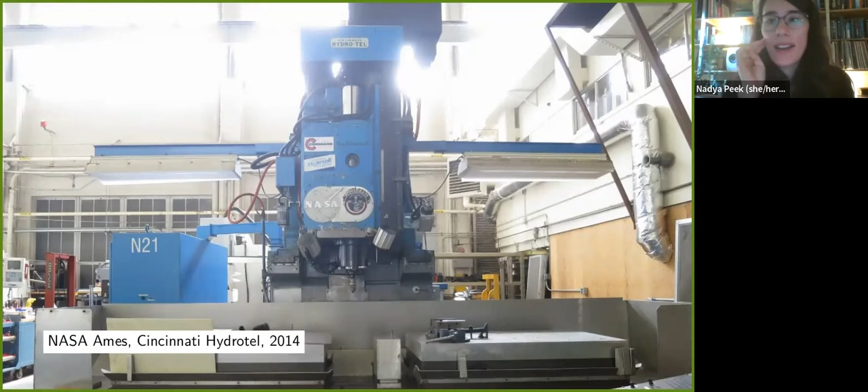The only difference between this milling machine and this milling machine is that one of them runs Windows 7 and the other one ran on punch cards. And so I guess there's a lot of ways in which maybe modern computation has made it easier to use machines like this, but there's not really something totally different in how we interact with these machines, or how we tell it what we want to build and how we're building it.

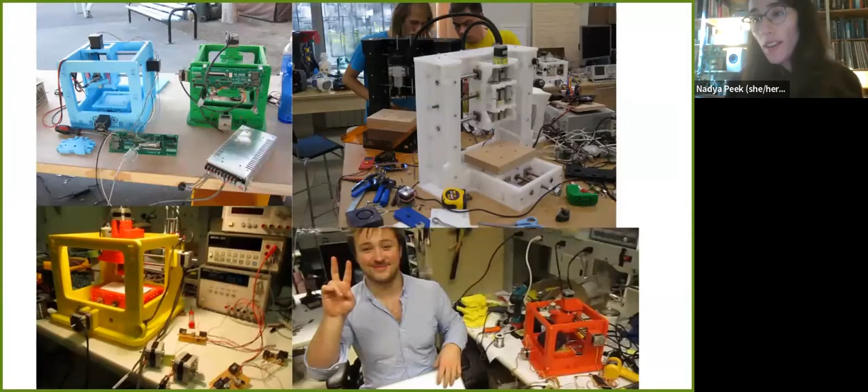Now, at first I thought that maybe this is just an education thing. It takes a while to learn how to use a milling machine. So how do you make it easier to learn how to use a milling machine? Maybe if you all had lots of smaller milling machines, it would be much easier to learn how to do the programming and play around with making different kinds of things, and ultimately be really comfortable using digital fabrication.

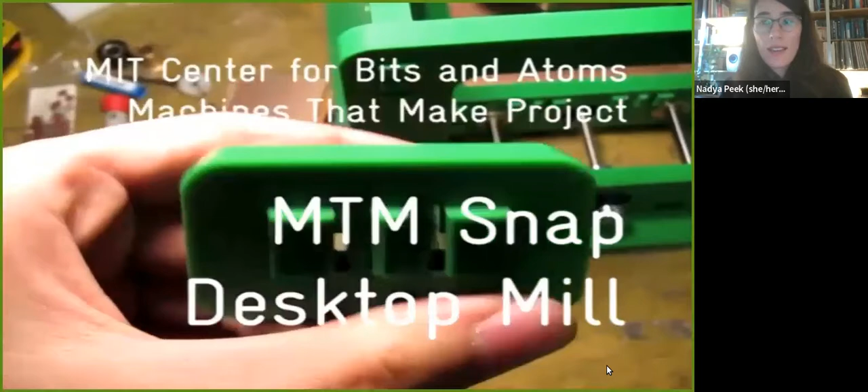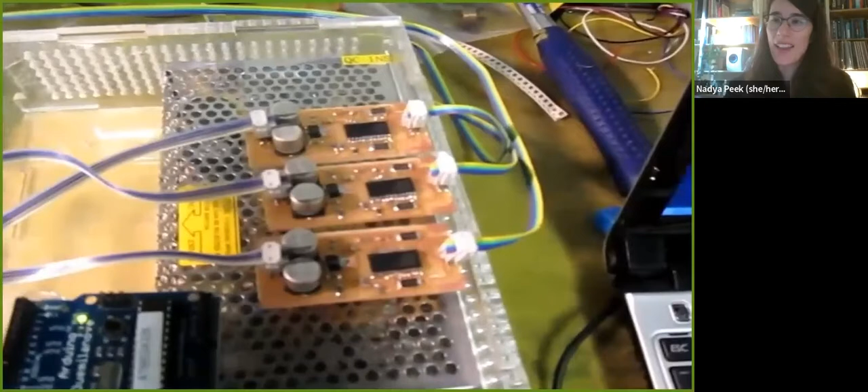So here are milling machines that I worked on as a graduate student at the MIT Center for Bits and Atoms with Jonathan Ward and others, David Lakatosh here in the picture. The idea was that you could go up to a milling machine, like a CNC mill you might have in your fab lab, and make a smaller milling machine, and then take that home and use it whenever you want. This was an open source machine made out of cutting boards that snapped together, and you could use it for milling circuit boards or wax blocks or other things that maybe you're familiar with doing at IAAC.

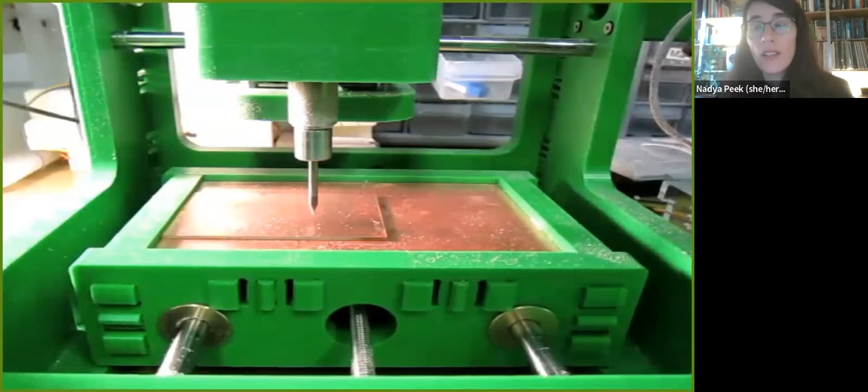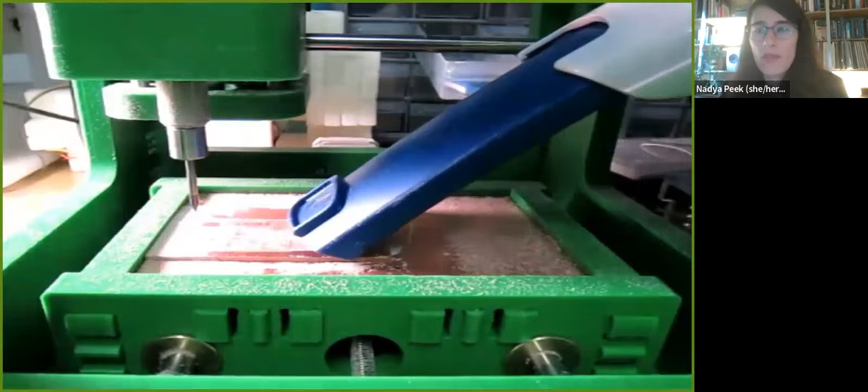And there really the idea was, if we can make the access exponentially grow, because anyone who uses a milling machine can now make a milling machine and therefore have a milling machine, then it will become much easier for people to learn more about milling, and they will do it much, much more. That wasn't really the case. There were not a huge number of people who built this machine despite it being open source. So we thought maybe the reason is the functionality of this milling machine is the same as the functionality of milling machines that you can buy off the shelf, and maybe people want something much more different or unusual.

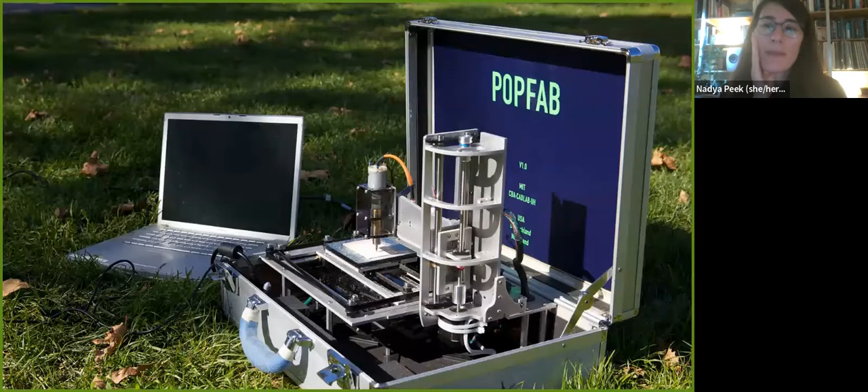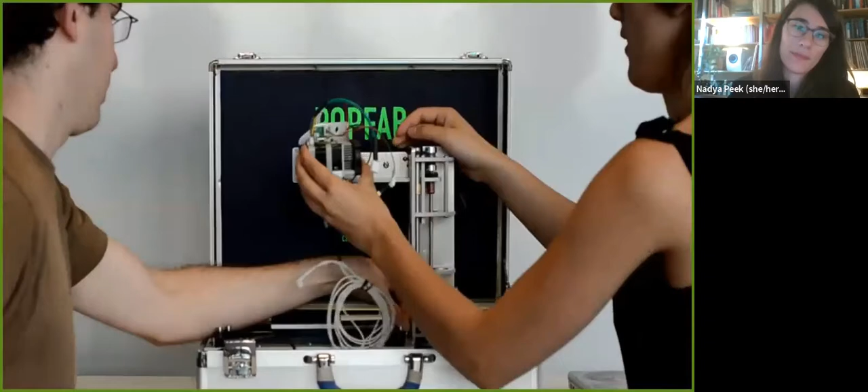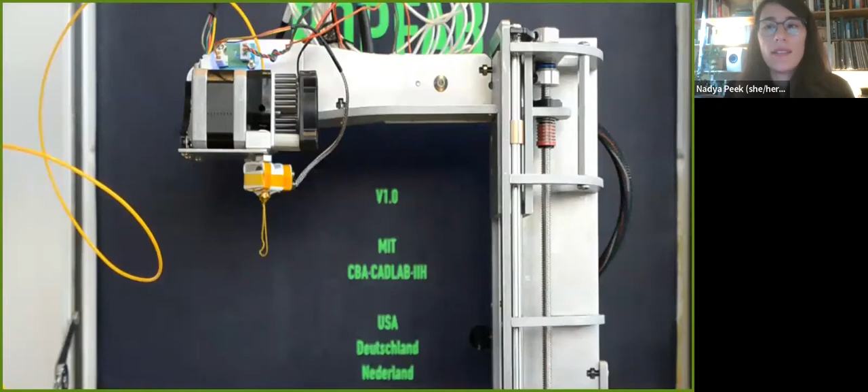And so with Ilan Moyer, I worked on something that we thought was going to be more like the laptop of digital fabrication. This is PopFab, which is a multi-type fabrication machine that fits in a briefcase, and you can open it up and put different heads on it. So here is a 3D printing head. It also had a milling head and a sticker cutting head. It had all these things that it could do in this one pop-up work envelope.

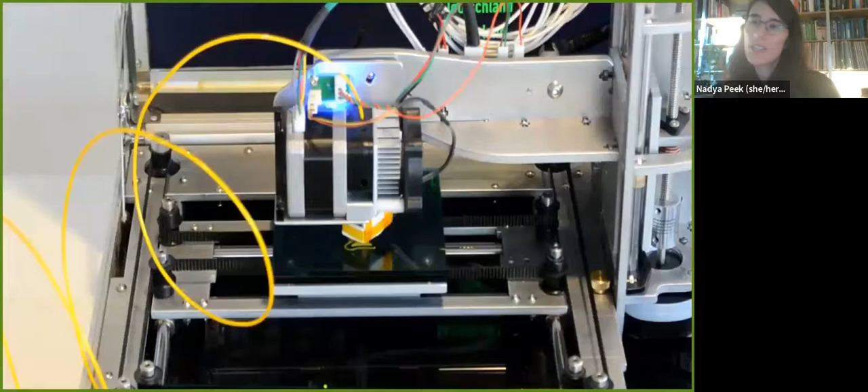It was sort of fun to carry this machine around because it did give you portable access to digital fabrication, as opposed to having to go to the Fab Lab or to a place where the machines were much bigger. But then there were other problems with the size. Ultimately, you couldn't make anything bigger than this work envelope. It was just like having access to a small tool that you carry around. And that was a major difference with a laptop and a supercomputer. If you calculate something on a supercomputer, you get a number out, and you calculate the same thing on a laptop, you get the same number out.

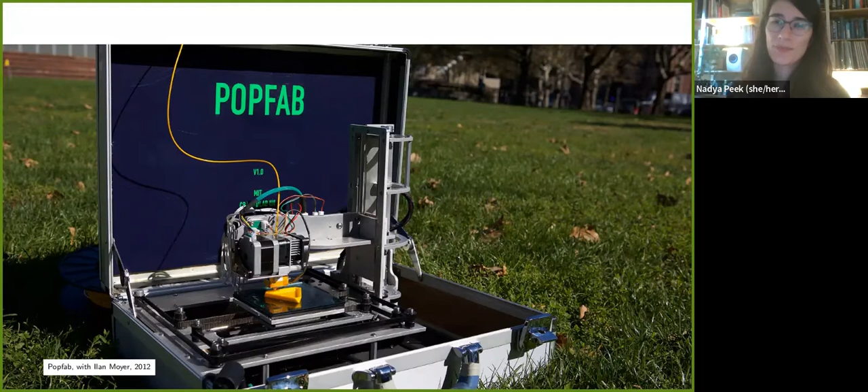And so despite having lots of fun building small machines that did similar things to bigger machines, I kind of came to the conclusion that it wasn't so much the learning how to use digital fabrication machines that was the problem, but more so that they weren't actually doing any of the things that people wanted to use them for. And even if they were very precise, you couldn't use them in lots of different contexts.

This machine, despite it being portable and being able to bring it to lots of different places, couldn't work in its environment. You couldn't change the context it was in. You could only make things within this tiny work envelope. And so thinking about, what does it mean to have precision as a creative tool, and how do you use it in these different contexts? And working with a lot of people who are talented machine builders, starting to wonder, where does this really need to go to make precision really into something that you can employ creatively in different contexts?

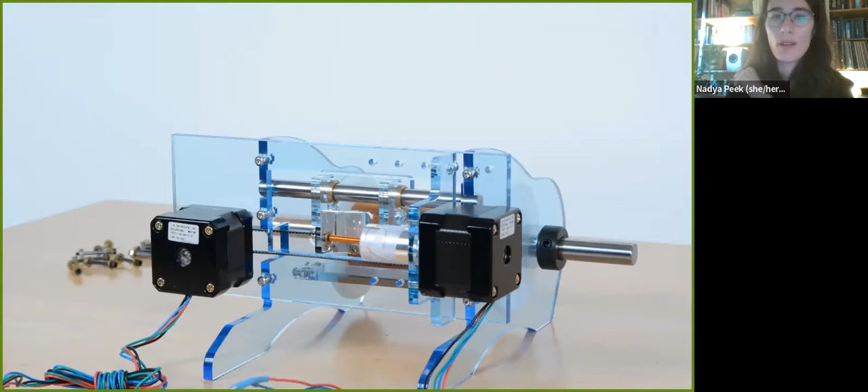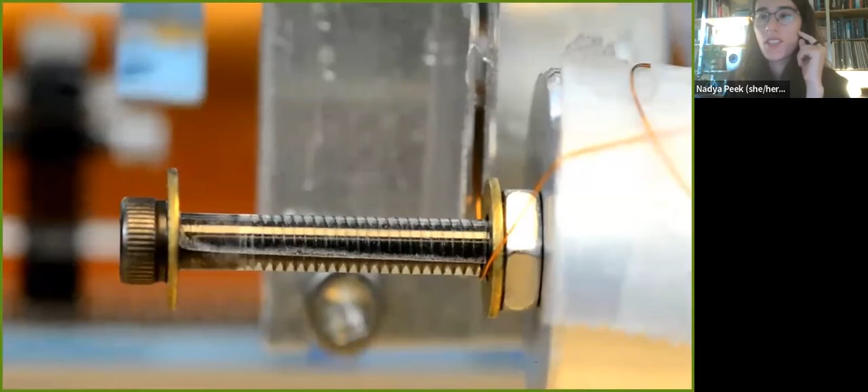And Ilan, who I was working with on PopFab, at some point needed a lot of coils because he was making electromagnets, and he made this little machine that I really liked. It's just 2 motors with a laser cut body, and the only thing it does is make these coils so that he could control the pickup and drop off of warp threads in a loom that he was making.

And it wasn't like he needed a ton of these coils. It didn't have to be super fast. He didn't need really high efficiency in the production. But what he needed was all of the coils to be exactly the same. And winding them by hand would have been really tedious and a lot less precise than this machine that he was able to really rapidly prototype using digital fabrication tools. And so it made me start thinking about, okay, what goes into the rapid prototyping machines, and how do you even define what the machine is and what it does?

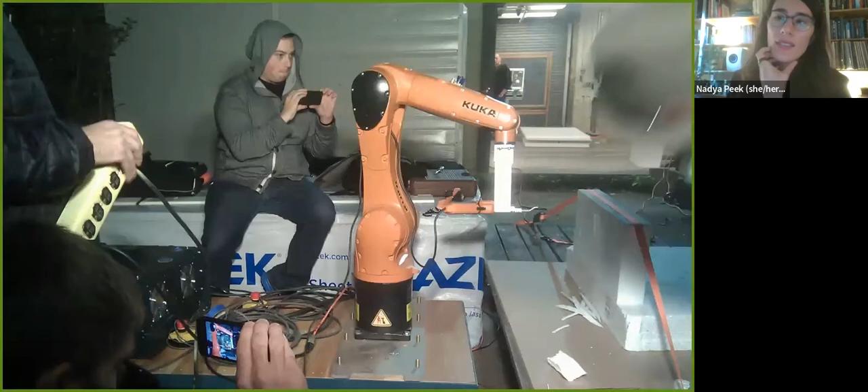This is an example that I think is really telling about how to be able to reconfigure a machine to do something that you want. These are architecture students who are cutting a complex surface out of styrofoam, which you see on the right. And they made their own CAM module in Grasshopper. They're doing all these complicated calculations. They have this cool robot arm that they can control using Kuka PRC. And then they're cutting the styrofoam with this hot knife. So the knife is at the tip of the robot arm.

And the temperature control of that knife needs to be such that it cuts the styrofoam well, but doesn't melt it too much. And to be able to control that temperature, they're trying to get this done, it's late at night, they just asked the guy who's standing here on the left to flip the switch on the surge protector, turn it off if it gets too hot, and turn it on if it gets too cold. So despite us having access to all of this technology, all this computation, so many people involved in this project, the system integration to this machine was so complicated that the fastest and cheapest way to do this was just to have someone stand there the entire time during runtime, controlling something that would have otherwise been an extremely simple control algorithm to write.

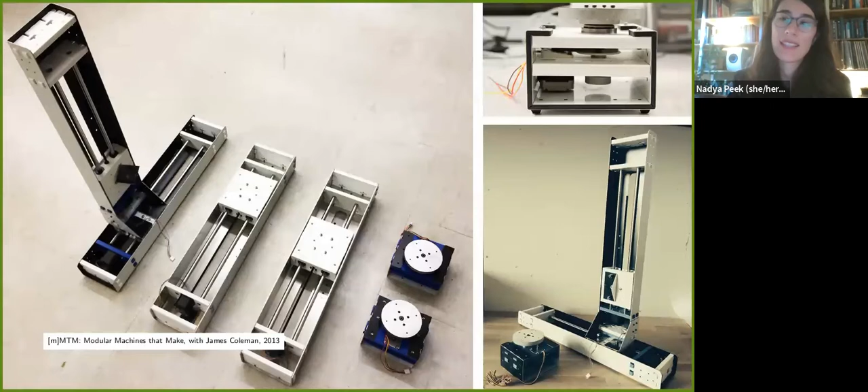Like, how do you make it as easy as possible to set up lots of different digital workflows, digitally controlled workflows. So together with James Coleman, I started building all of these little modular machine parts. So these are linear stages and rotary stages and different machine modules that you could connect together in different ways, so that you could build machines sort of on the fly.

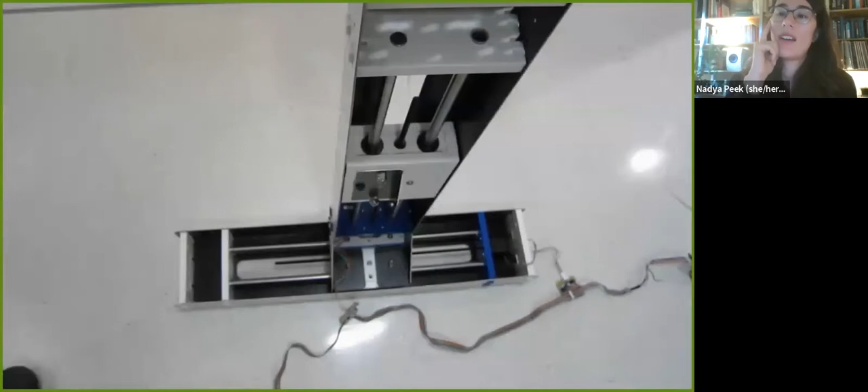And an important part of this was not just the stages, so here we are doing more foam cutting, but also the controllers that allowed you to just add more and more components to the machine as you were doing different things. So here I'm plugging in these little Gestalt nodes, which we worked on together with Ilan Moyer again, to be able to control each module individually, but as a network of components that you could then all talk to at the same time.

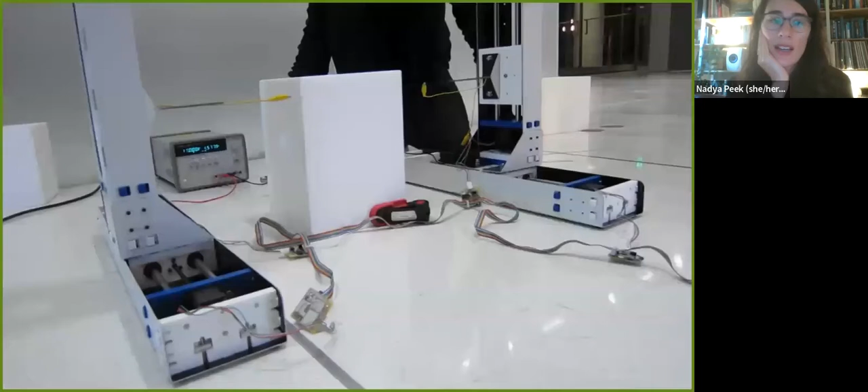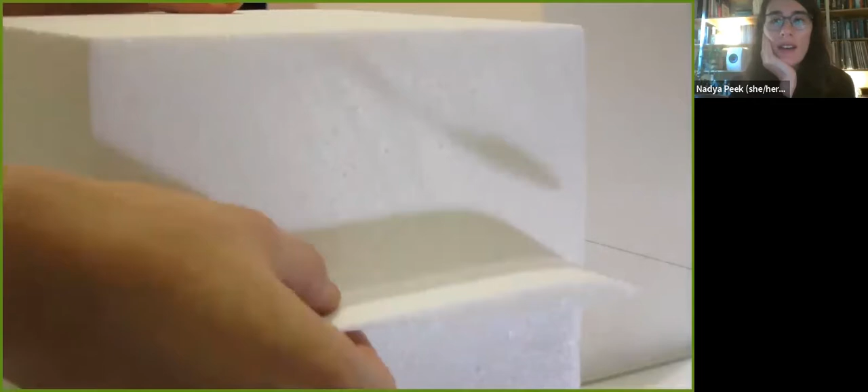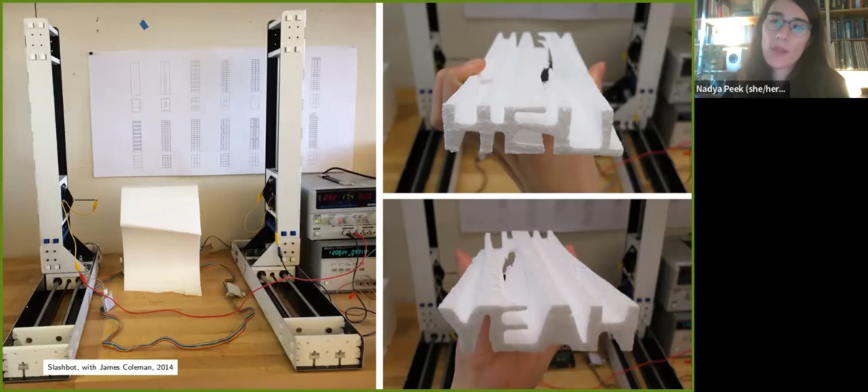And so as you were adding different functionality or different parts to the machines, you didn't have to redesign the whole control board, or you didn't have to rewrite the firmware. It was a matter of adding and removing things from the network. Yes, very serious fabrication task. And so that way you're also able to interface with different kinds of design software to be able to build your toolpaths in lots of different experimental ways.

Here's a part that I think I would be very, very hard pressed to make by hand. Styrofoam thing that says hell on one side and yeah on the other. So it's just the kinds of things that you can do if you have control that are so difficult or almost impossible to do by hand. And if you want to change anything about the machine, instead of adding a person flipping off and on a surge protector, you're just adding another node to the control network.

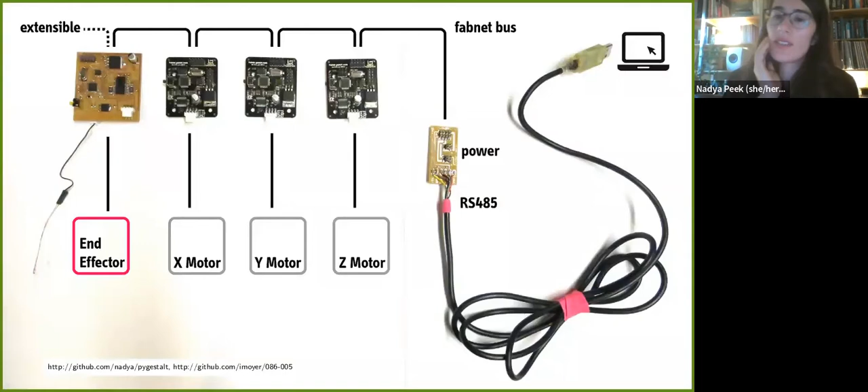And when you add another node to the control network, you describe that node in what we call the virtual machine in a Python library that we wrote. Yes, and the Python library basically allowed you to also switch out virtual machines that were maybe talking to different software applications or different physical machines as sort of a lightweight interface layer. So say you wanted to talk from your own Python script, you could then talk to the virtual machine object, which would then control the machine.

Or if you wanted to change the machine, say you were using a small machine and now you wanted to change to a larger machine, or to a machine that had a different drivetrain, you wouldn't have to change anything about the toolpath design software. You would only have to change the virtual machine object to make sure that you're describing the correct machine.

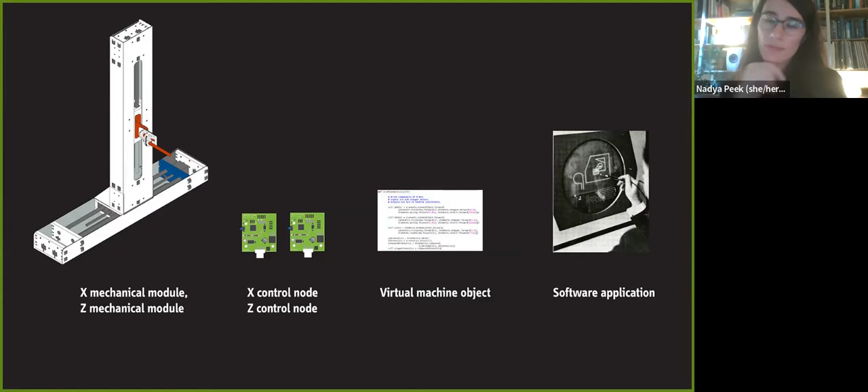So you can control it from Grasshopper, or you could control it from mods. I don't know if you at IAAC in the Fab Lab are using mods, but you know, ways of controlling machines from browsers or creating different interfaces, and really making it easy to set up lots and lots of different kinds of workflows.

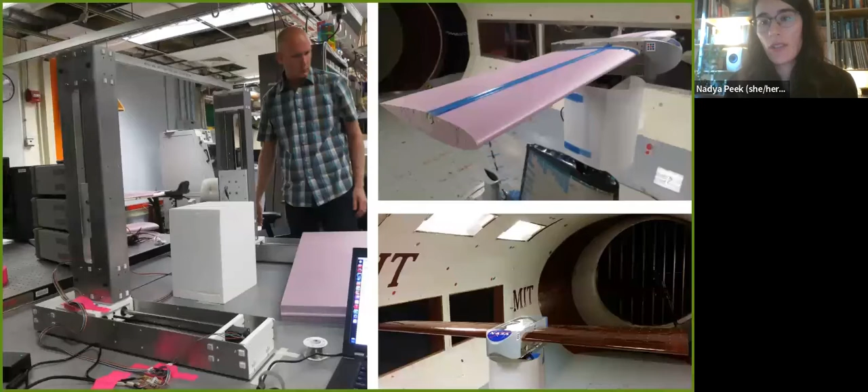Here is a machine that we built very quickly for Janet, who needed to have this airfoil at very short notice. And so we set up a machine to cut a much bigger version of the example cuts that we were making. We made different 3D scanning machines and image capture machines. And we made a lot of different machines with these modules.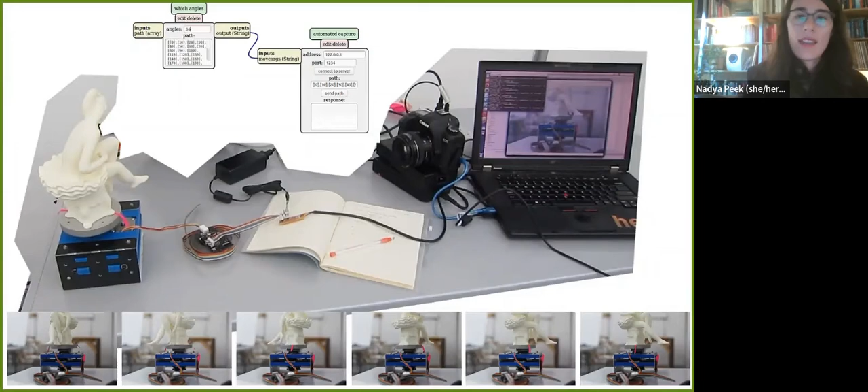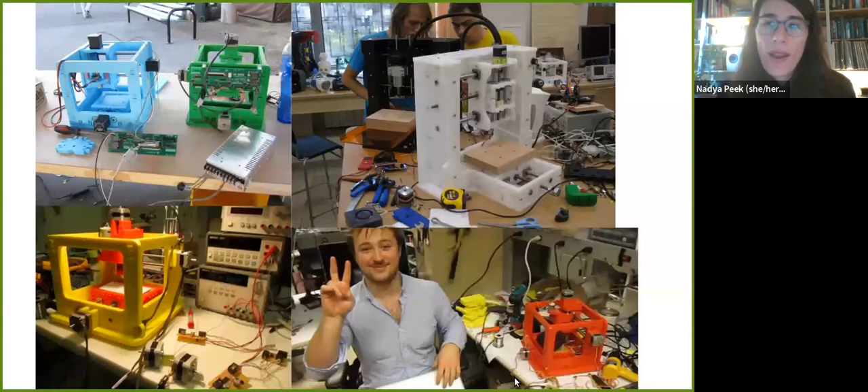But the problem was that just we had the modules. They were like the MTM Snap that I showed you before, and like PopFab, all of these things were open source, but nobody else was building them. And part of it was maybe just that it was too hard to build a lot of the machines that we designed. PopFab was water jet cut and required a lot of complicated assembly steps. The MTM Snap was maybe slightly easier to make, but still required some complicated system integration.

There's just not a lot of people building the modular machine components that we had built. They were all made out of sheet metal and things that you needed maybe a brake for, or other sheet metal working tools. And it was just not something that other people were taking on.

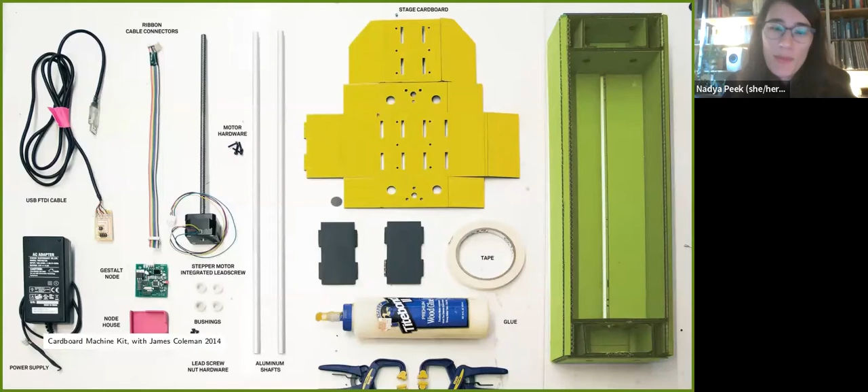So James, Alon, and I decided to make a much more lo-fi version of the modules out of cardboard. So we developed a cardboard machine kit with the idea that you could really quickly prototype a machine, and the point wasn't to replace existing machines. So we're not saying, oh, get rid of the Cincinnati Hydrotel at NASA Ames and replace it with a cardboard machine. No, it was, if you don't have a machine and you want to experiment with how to quickly build one, kind of in the spirit of Alon's coil winding machine, then how do you make that

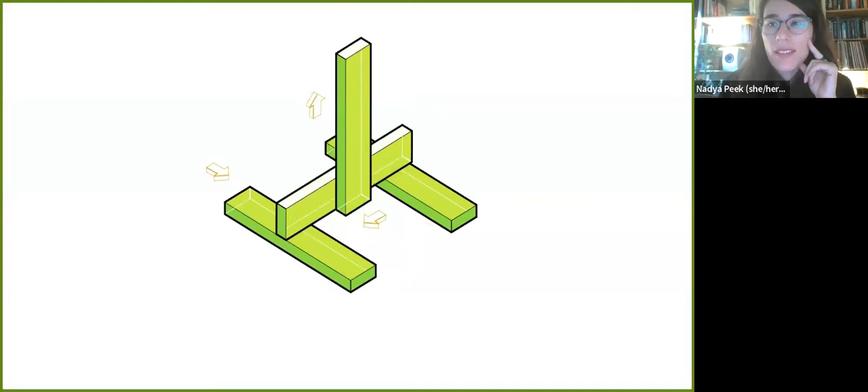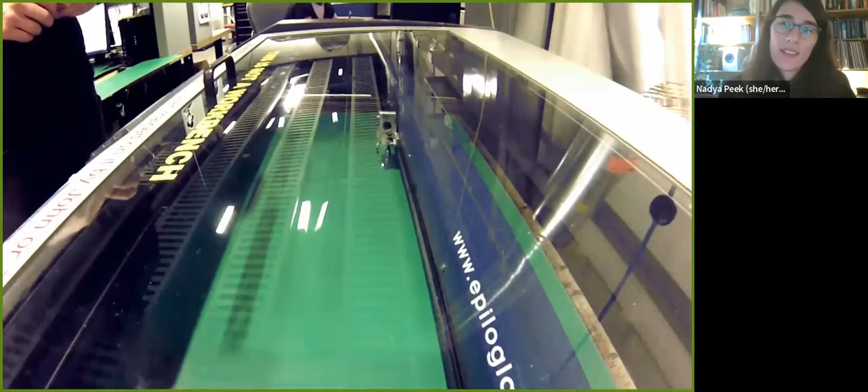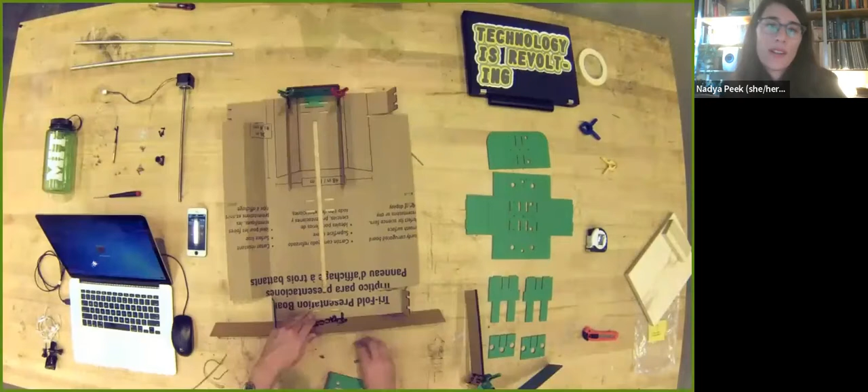as easy as possible? So the cardboard machine kit was laser cut cardboard. So you use the precision of the laser cutter to be able to make the frame. So here I am laser cutting, and you're partially scoring and partially cutting through the cardboard to be able to do accurate folding. Here are the Gestalt nodes for the network controls, and the cardboard stages had different positions in which you could connect them to each other.

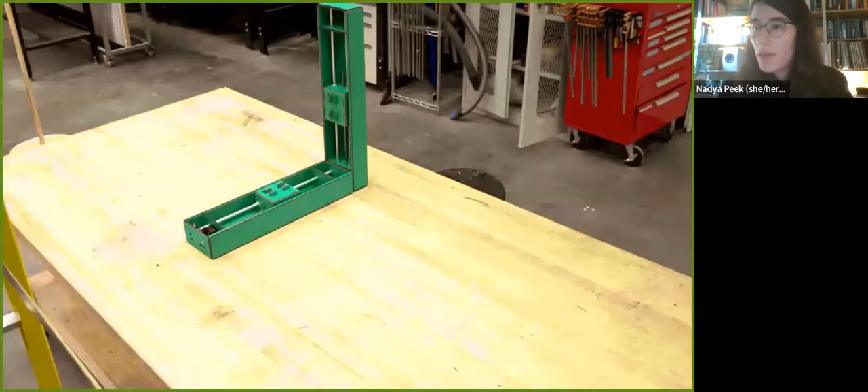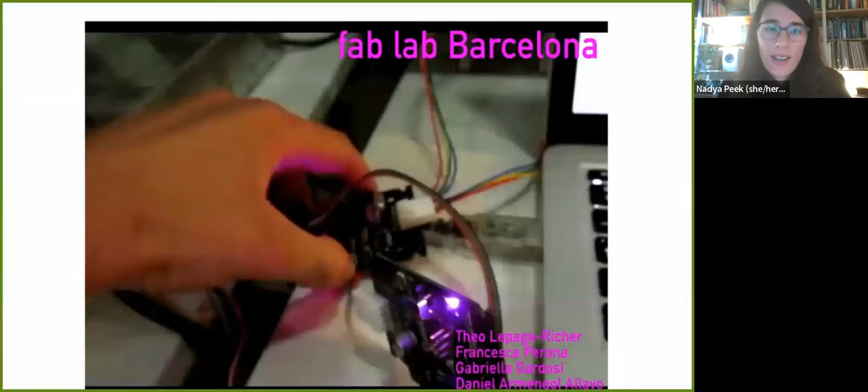So the idea was that it wasn't supposed to be months before you had built a machine, but a matter of hours, or that you could really prototype computer-controlled motion very, very quickly. And we actually used this in teaching in Fab Academy for a few years, where lots of people in Fab Labs all over, including at IAAC, made a bunch of different kinds of machines with it. So machines for plotting and machines for coffee mixing. This is like an iPhone 3D scanner. And a lot of these machines, they're not the most fancy or serious things. They're doing funny stuff like light shows and cocktails and ketchup.

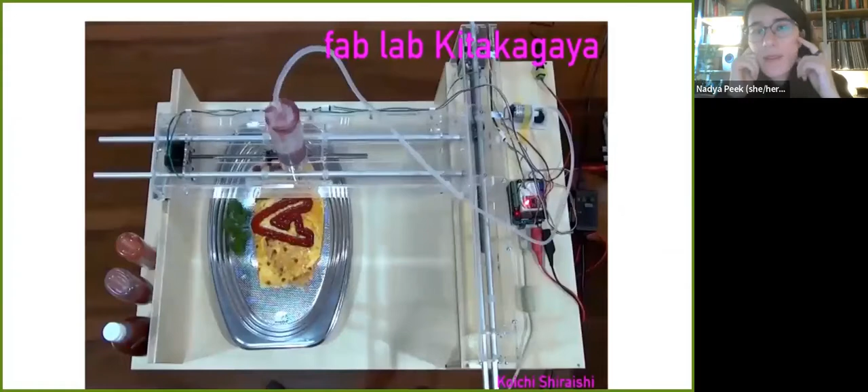But it was the possibility of iterating with, nobody was thinking, oh no, here's a scary machine and I don't know how to hack it. Everyone is like, oh yeah, it's just a bunch of stuff that I put together made out of cardboard, and I can easily add an extruder, or I can easily add a syringe, or I understand how to interface with and modify that. And that kind of iteration allows for using things in lots and lots of different ways.

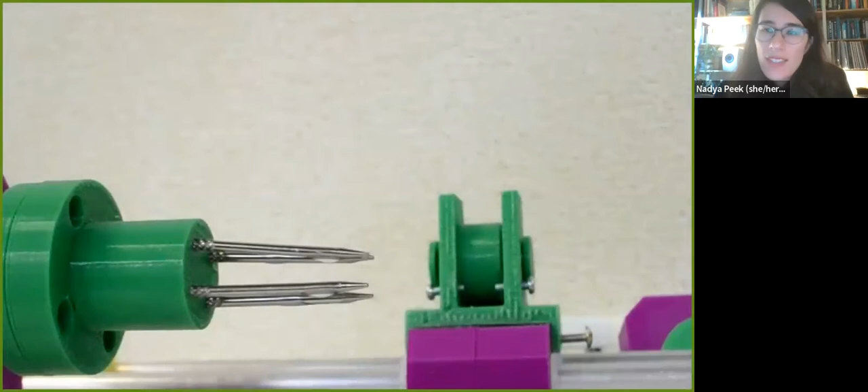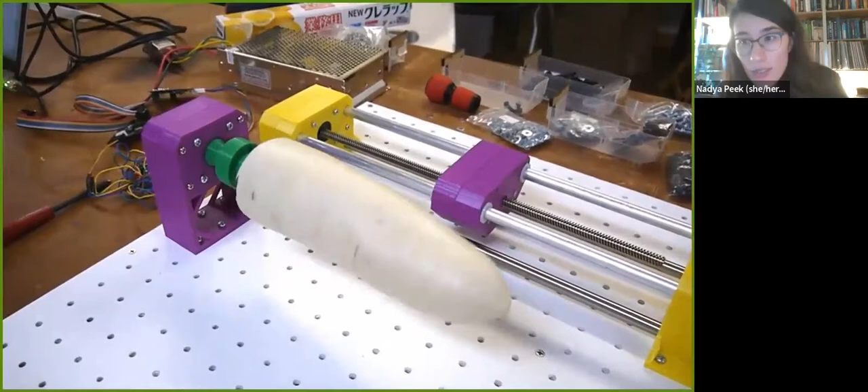Yeah, maybe I can show you this specific example of one of my favorite machines from Japan, from the Fab Lab Sendai. It's for daikon radishes. And you can see that they have some digital fabrication skills already. They're good at 3D printing, and they have these motors, and they have these modular controllers that they're connecting to each other. And even in this 2-week Fab Academy assignment, you can see them learning different things to be able to understand how to automate this peeling of a daikon radish, or making daikon radish noodles. So they added this tailstock. They looked at different things that had to do with the starting speed and the amount of force that was necessary to start versus to continue.

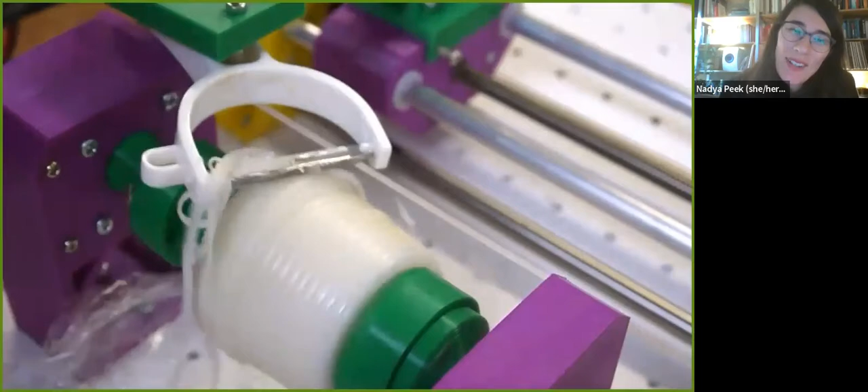Yeah, and you know, these daikon noodles, it seems kind of silly, but it also seems like the kind of thing that would be mega tedious to make by hand. So just the idea of making inexpensive, quick turnaround little kitchen robots. I love it. I think it's very funny.

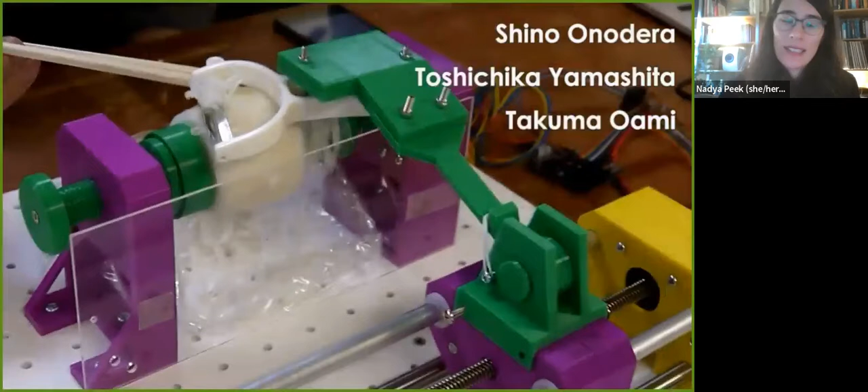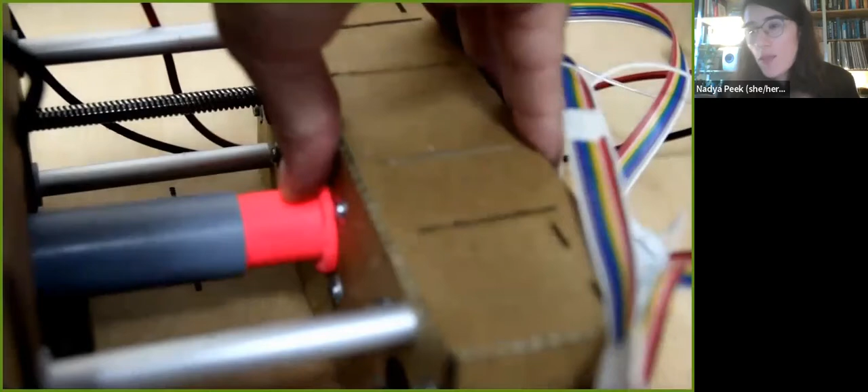There's another machine from a fab lab in Mexico where they wanted to have also a super application specific machine for connecting PVC tubes together at different angles. So to be able to connect them together at different angles, you have to be able to cut curves into them. You can't just cut them straight. And so this is a hyper specific machine just for cutting tubes of this size and different curved tool paths.

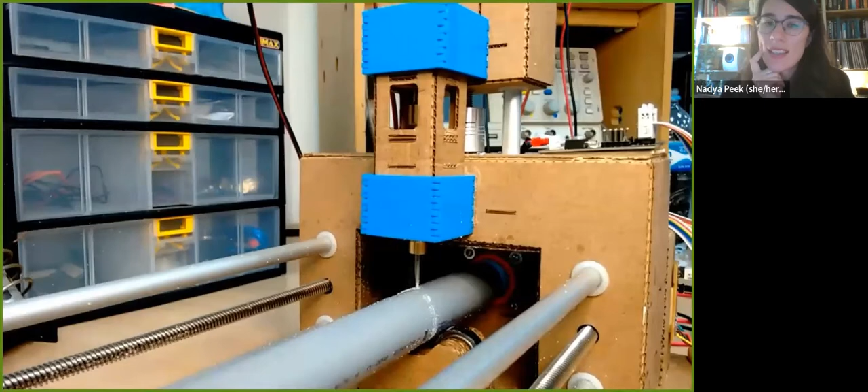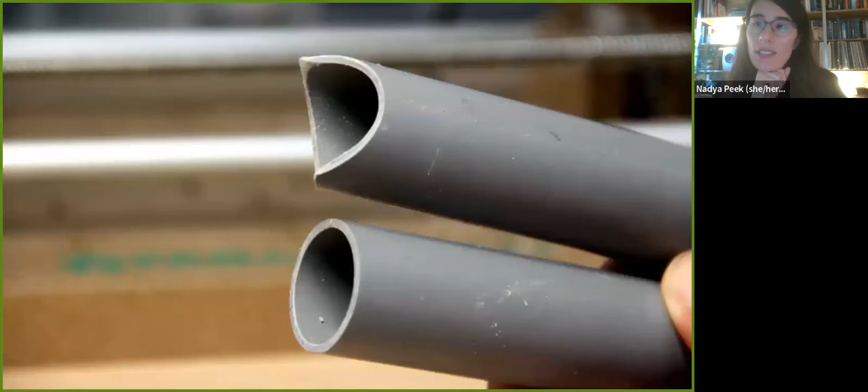And because it's just a very small structural loop, because you're only using this tiny end mill, you don't actually need to make the whole machine out of cast iron or the traditional kind of machine building materials. But experimenting with, okay, I need this particular cut, and I'm going to put together this machine to make this as easy as possible. Yeah, I don't know. I thought these are two great examples. Exciting stuff.

So with digital fabrication, people often think, oh, digital fabrication is just one machine. I'm going to go up to the 3D printer and that's the machine that I'm going to be using. But actually, I think digital fabrication is the creating of all of these different workflows that span materials, computation, design. There's all these different parts that can be varied, that are interdependent in different ways.

And it used to be that those things were all actually separate jobs. There was someone who did CAD, and there was someone who ran machines, and there was someone who programmed. And those people had to communicate with each other. And all of these things ended up developing in these siloed environments. And so sometimes the most difficult thing about doing digital fabrication or different kinds of computer controlled workflows is how to translate from one to the other.

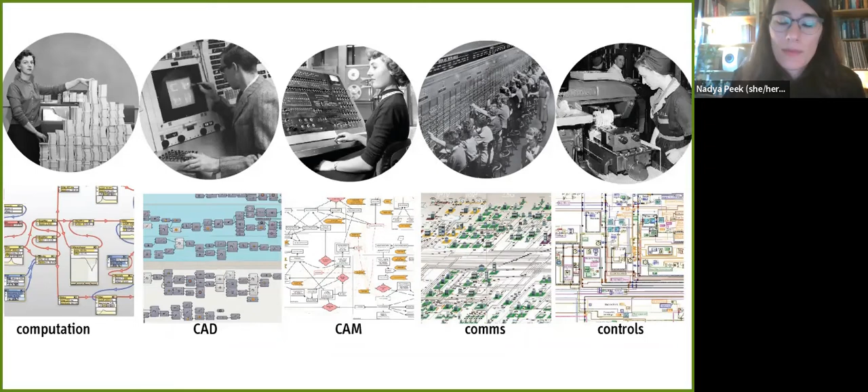I'm sure that you at IAAC have had lots of trouble where you wanted to export something in some format, and instead you needed to export it in DXF R11, or there's all these problems in translation that happen that are difficult. And how do you support that? How do you support the making of the workflow and being able to test at different insertion points? How do we make tools actually for creative automation?

And when I was in school, what we were taught was you start from design intent, and then you make a digital model, and then you slice it, or you make the CAM for it, you create the machine instructions, and then the machine makes the final product. And then you iterate, and that's how digital fabrication works, this sort of canonical workflow for digital fabrication. But

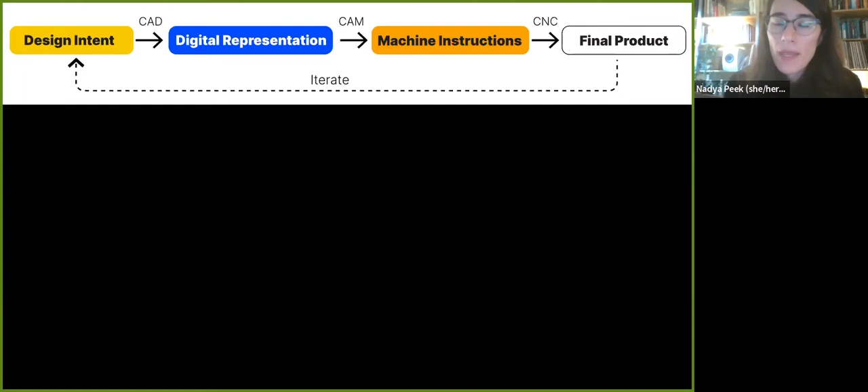when you look at what people are actually doing with digital fabrication machines, and over the pandemic, my student Hannah Twigg-Smith has spent a lot of time looking at plotter Twitter, the hashtag for sharing different kinds of plotted art, really what we found is it's not this canonical workflow at all. It's people constantly experimenting with different pens and papers, and experimenting with different speeds. They're not all trying to have this seamless user experience. They're really trying to iterate and develop custom workflows that allow for lots of different kinds of exploration.

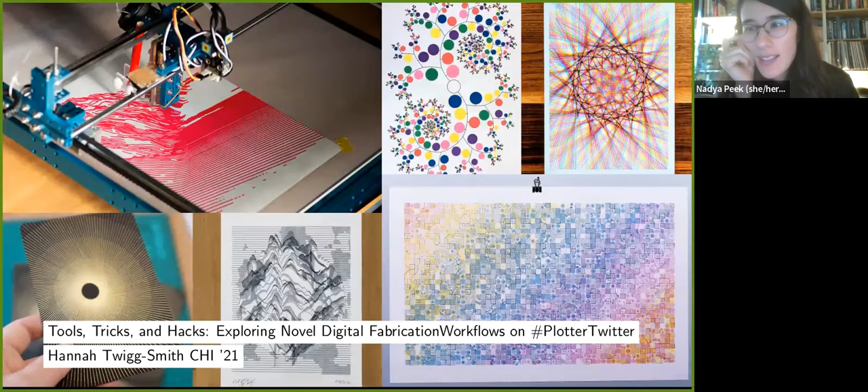And so when we develop tools for that, how do we support that generative and iterative kind of work? Rather than seamless experiences, how do we support creative practice? And so that, I think, has to tie further down, not just modularity in the machines, but also modularity in how we talk to them and how we extend them. And so for machine design and machine building, that has changed my approach.

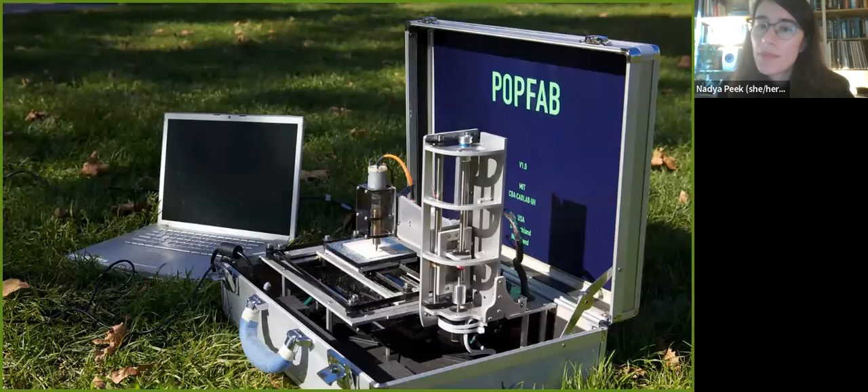Rather than making things that look really slick or fancy, how do we make things that are actually easy for other people to build? How do you make it fabricatable, so that you have limited equipment required to be able to build the parts, and that the putting together of the design isn't super complicated. Whereas with the MTM Snap, you needed maybe several people to hold parts at a certain time to be able to put it together.

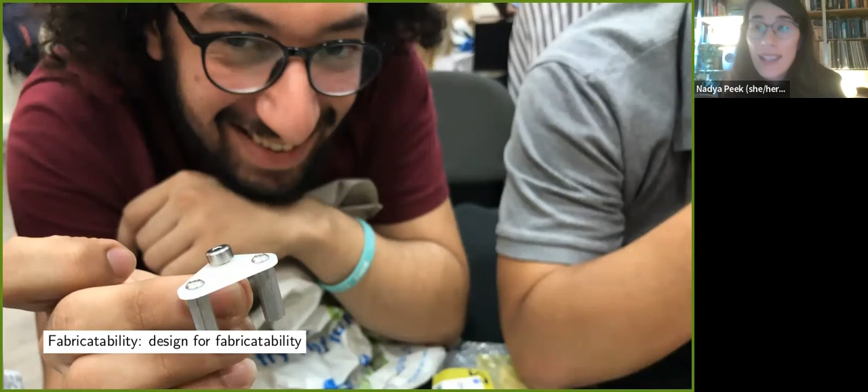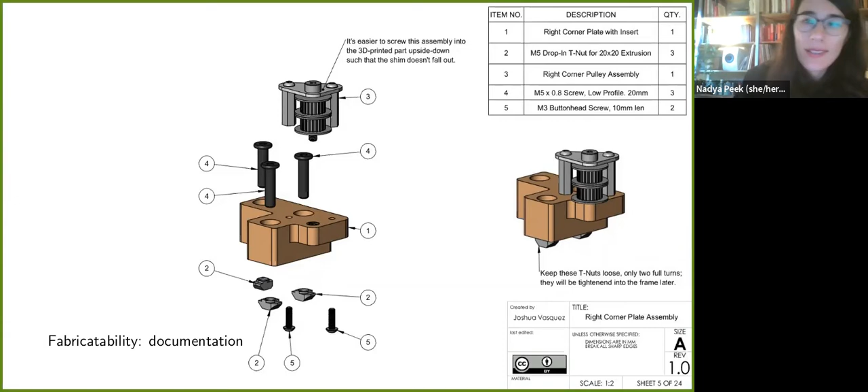How do you make the assemblability of the design super easy, as well as the documentation, something that a lot of people can follow without necessarily having the same expertise that you had going into the project? And how do you also include in the design all the tools that you need for building the design? Here we're pressing these pins into the blue 3D printed part, and underneath there is an orange support part that's holding the 3D printed part, such that the pin is going in exactly at 120 degrees or 90 degrees with respect to the table.

And so it's a very different kind of design criteria, or very different design goals than you would otherwise see in industrial machines or machines that are made for really high efficiency and high throughput. Instead, it's more about extensibility and being able to be customizable by other people. And how do you also support them? In my group, we support a lot of active Discord communities for people who are trying to build our machines. Instead of just saying, read the manual, how do you actually really support and understand who is trying to build and extend them?

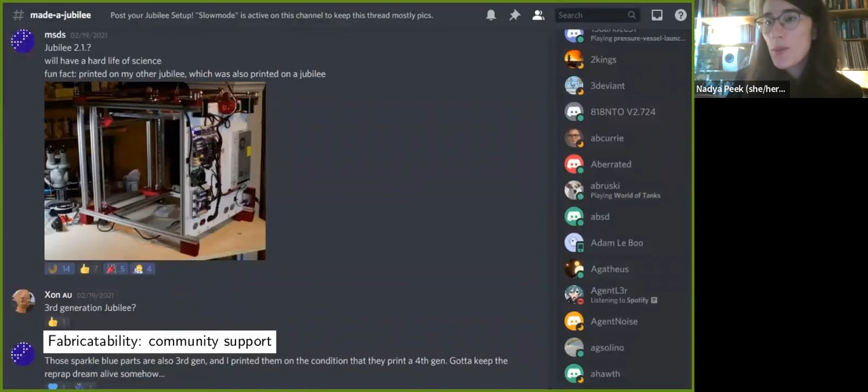So one such machine is Jubilee. Jubilee is kind of similar to PopFab, in that you can change tools to have different tools on it, but it does the tool changing automatically. So you can pick up and drop off different heads to be able to use different tools in one workflow.

So for example, it has a cable-driven tool lock. So here is how you would attach, for example, a microscope tool head. It has a little wedge plate, and then there's a twist lock that holds it in place. And this is a kinematic mount, just like in PopFab. So whenever you pick up and drop off the tool, it ends up in exactly the same place.

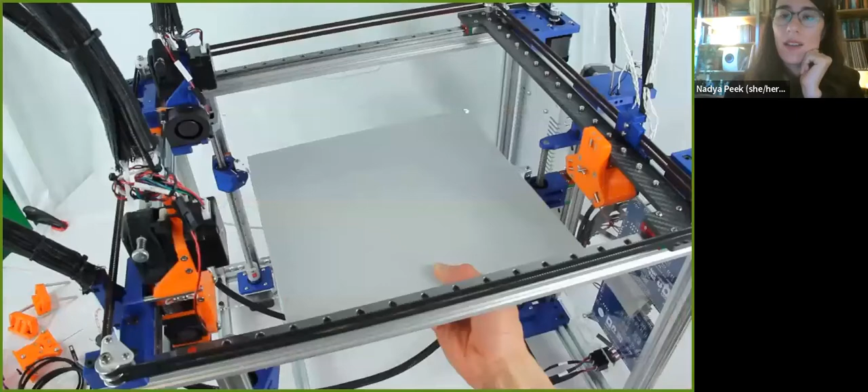The bed plate is also a kinematic mount, so you also don't have to re-zero every time you remove or put back the bed plate. Yeah, you can do a bunch of different kinds of operations. You can pick up and drop off pen tools, or a lot of people who use Jubilee use it for multi-material 3D printing. So you can drop off one extruder head that's printing in blue and pick up another extruder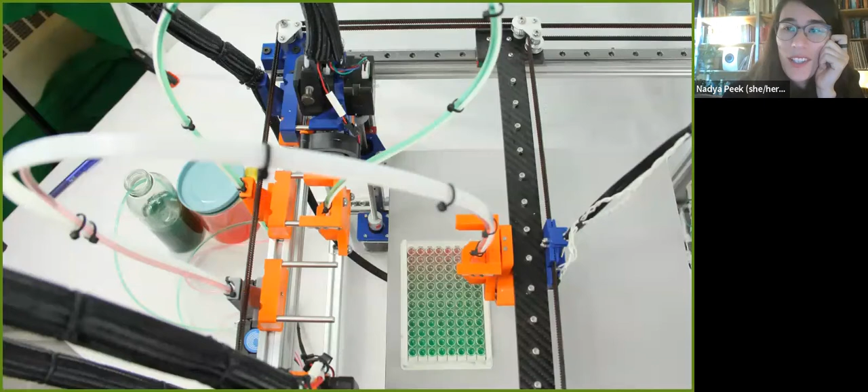head that's printing in orange, or use Jubilee with its syringe head for doing different kinds of liquid transfer, to be able to do different kinds of, yeah, I don't know, bio stuff. Increasingly, we do a lot more with science experiments, workflows, not just different kinds of fabrication steps.

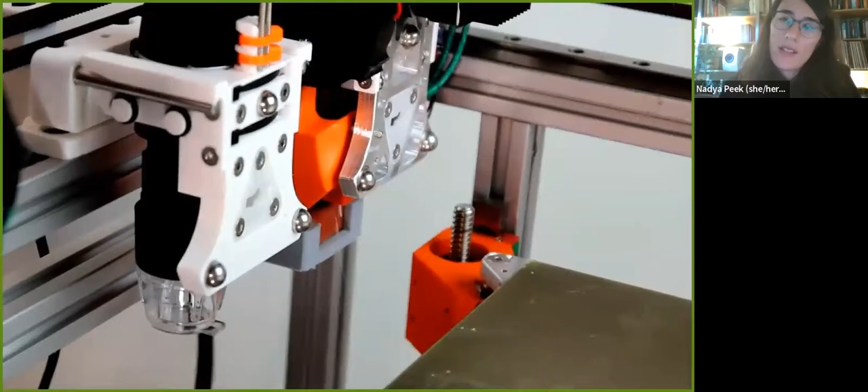Yeah, and I guess unlike maybe some of the other machines we made that were more slick in terms of their industrial design, Jubilee is really designed for A, automatic tool changing, and B, being able to do these really heterogeneous workflows. For example, to be able to do microscope inspection of something and 3D printing in an automated fashion. So you can drop off a microscope and then pick up a different kind of tool to do something totally different.

And instead of just for fabrication, people are increasingly using this for doing things like how do you create automated diagnostic tests? So if you can gather images of a sample and then do something with them, how can you use computer vision and other tools to automate some of these parts?

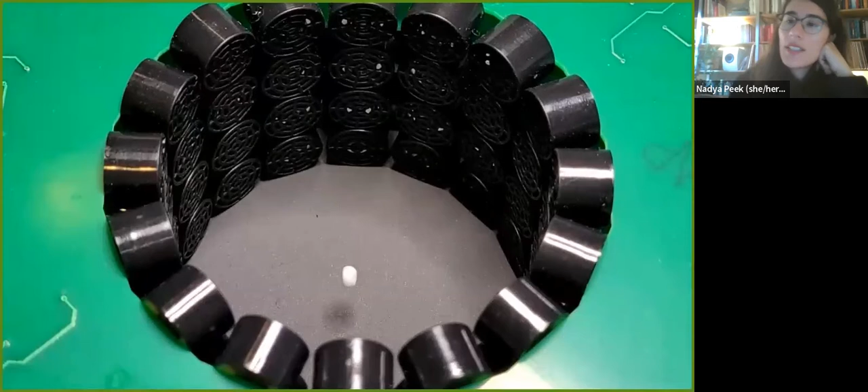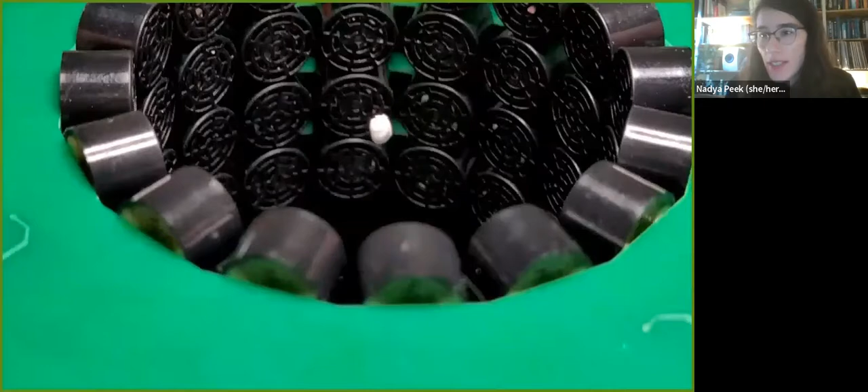We're also making novel manipulators for picking and dropping off things. So if you don't want to touch a sample, for example, this is an ultrasonic manipulator that can pick up small things and keep them in what we call a virtual container. So you can then suspend, this is like a styrofoam pellet, but you could also suspend water or small insects in air, and then drop them off without ever having to touch them, maybe damaging them.

I've been talking at you for a while, so I'm going to speed through maybe a few more things, and then I'll let you ask me questions because I don't see anyone, so it's sometimes hard.

This is a project by one of my PhD students, by Hannah again, who's creating different kinds of browser-based controls for controlling machines, not just one machine at a time, but if you're using several machines together, one for sample preparation and one for sample manipulation, how do you control the overarching workflow between them?

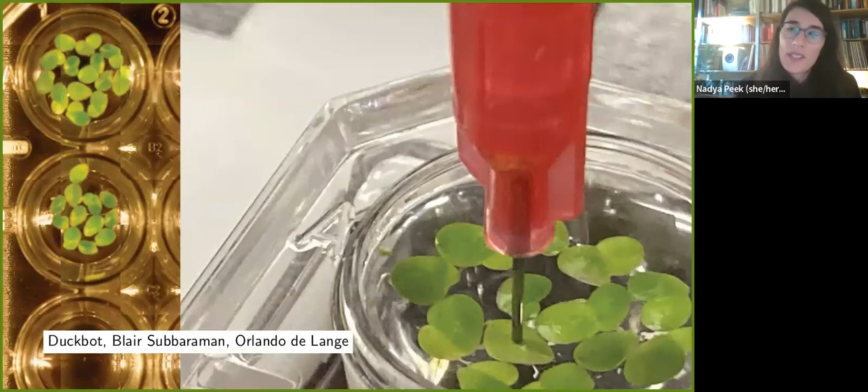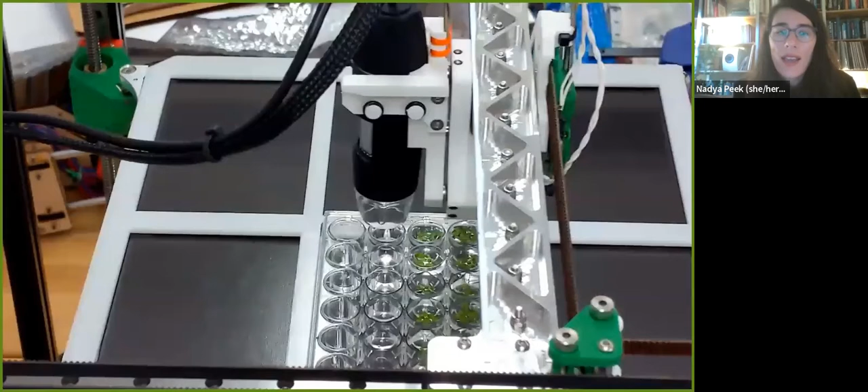This is Jubilee that Joshua and Hannah customized to be able to sonicate samples to do different kinds of chemical engineering experiments. Or here is another machine that we use to do automatic robotic transfer of these tiny plants called duckweed. So we can do this kind of progressive imaging of duckweed, and also picking up and dropping off duckweed in different well plates and being able to do different things with it.

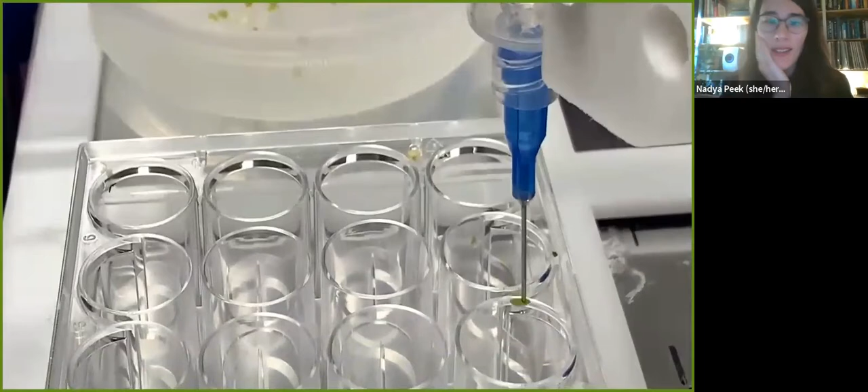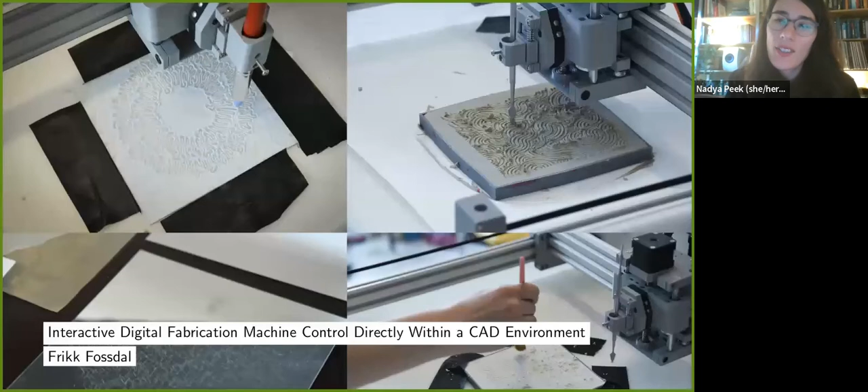So really a lot of experimenting with developing different kinds of workflows for doing strange things that maybe there isn't really a market for. So there's not going to be a company that's going to sell duckweed handling robots, but there still might be a project in which you want to robotically handle duckweed. Unceremonious drop off.

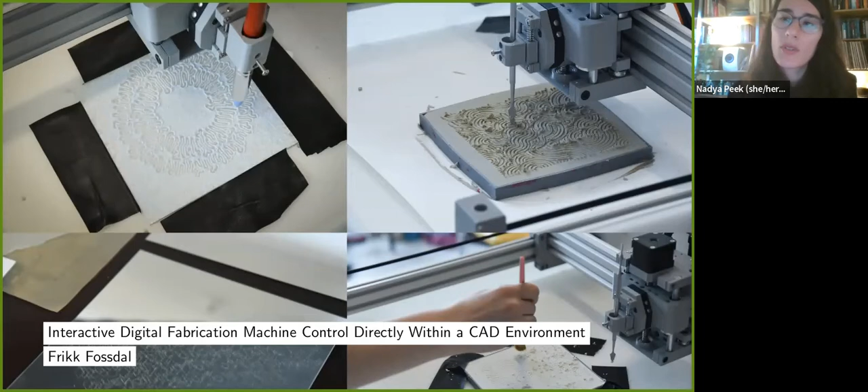Yeah, and also, coming back to fabrication, what are the effects of the different kinds of machines and toolpaths on the material itself? So this is a Grasshopper library that Frikk, another Machine Agency member, has been working on in Norway to be able to interactively control not just the geometry of the toolpath, but things like the acceleration and the jerk, to be able to really control what the material will actually look like afterwards, based on how fast and how you might move the machine around.

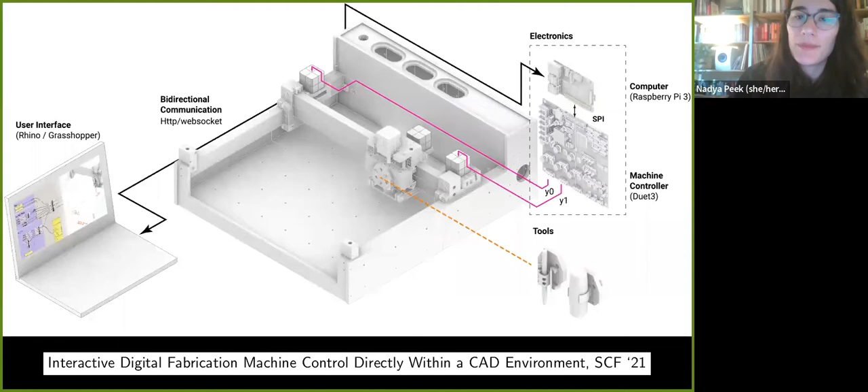Yeah, I'll tell you more about that if you ask about it in the questions.

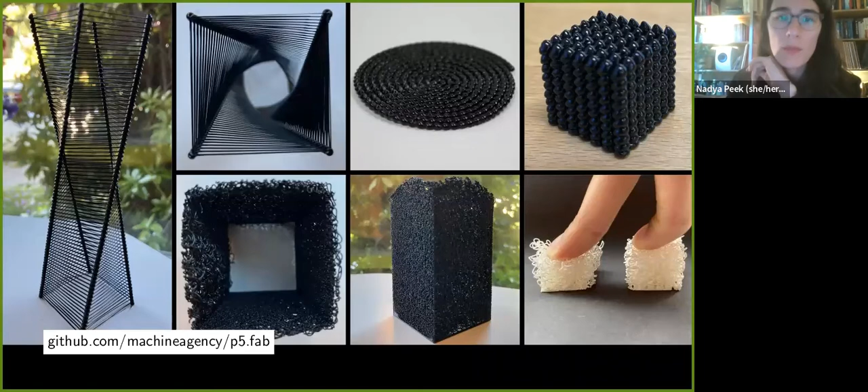Blair, another Machine Agency member, has been developing ways in which you can control digital fabrication machines directly from the creative coding environment p5.js. And so instead of 3D printing, for example, with a slicer, being able to make these sort of experimental and weird 3D prints where you're doing things like bridging or printing with blobs or printing kind of foam or sponge-like structures.

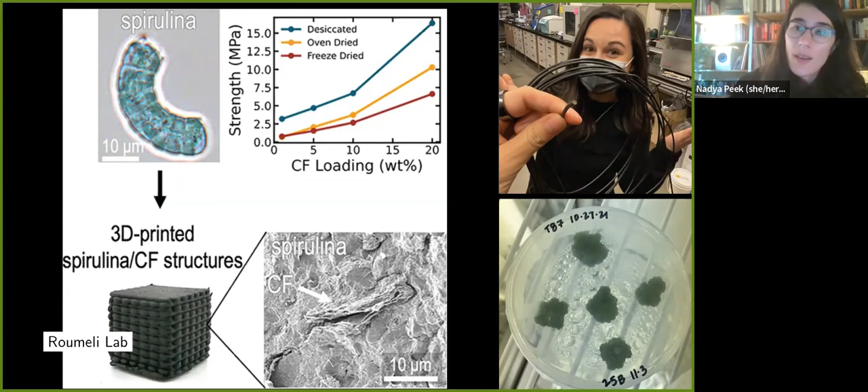And we've been experimenting with, well, what are the material properties of this, not just in tensile tests and other kind of standard material science evaluation, but what are the objects that we can make with it, and how does that differ from the kind of fabrication that we've been used to and doing before?

Anyway, so this may be a big whirlwind tour. I just want you to think about what's the difference between the Cincinnati Hydrotel and what you can do with a machine like this, and all of the things that you might build, different materials or different experiments or different ways of hacking and making machines.